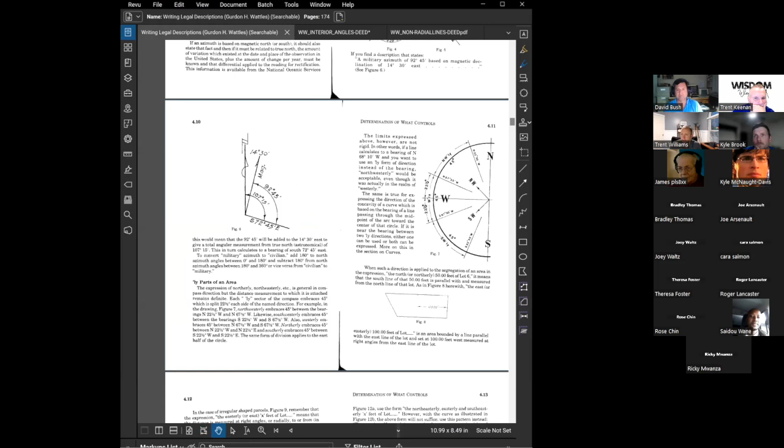So jumping into the book now, kind of these controlling calls, and we'll even talk about some of these in a little bit. But this first big section here is the apostrophe 'ly' parts of an area — the northerly, northeasterly. And again, that's something I noticed — was that first one, westwardly. Yeah, that's 'wardly' — eastwardly, westwardly, easterly, westerly, 'wardly'. One we don't see.

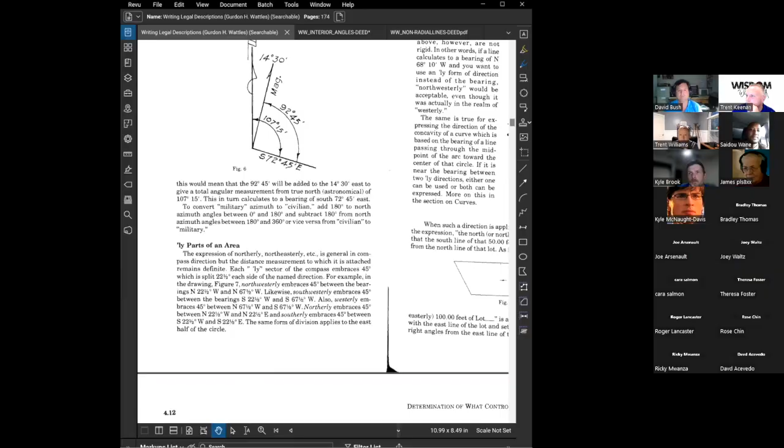Right. Can you try to zoom in on your screen? Because what happens is interesting — it shows the whole box, like the whole Adobe thing. It's showing my Adobe. Yeah, I'm not sure, because I'm using Bluebeam. I don't know how to do a full screen in this. Oh okay, maybe that's why. Yeah, I'm not sure, let me... You want to stop sharing, and then I can see if mine looks any different. Let's see.

Does that look different to you guys? Is that better? I noticed it even earlier today when I was doing some share screen stuff. It's bigger. Okay, cool. That works for me.

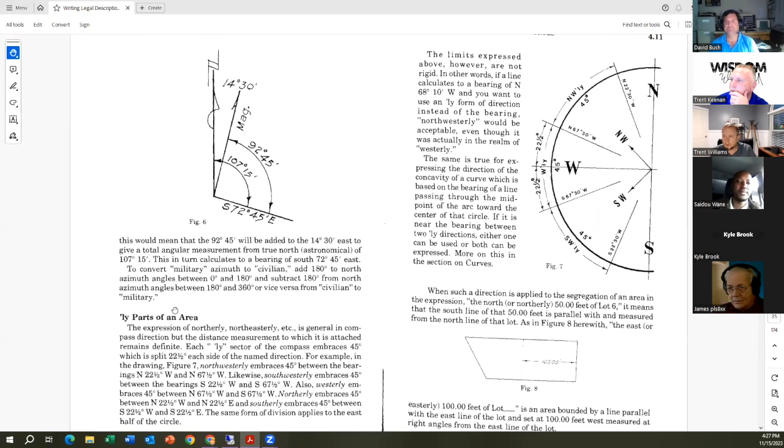So we were on page 410, which is really where this part is. This is the hardest thing to get through. If we want to do the roundtable discussion like we have been, there's a lot of figures, and he goes through how and why some of these don't work.

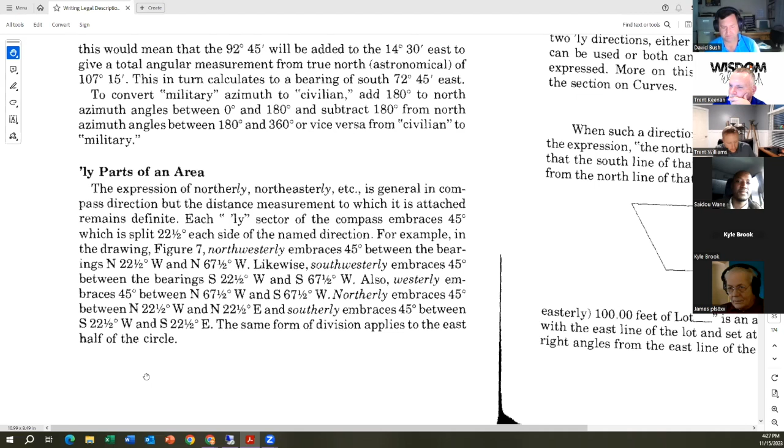If we go to the top of page 411, he has half a compass here, and he's trying to explain how we decide: is it northwesterly, or westerly, or southwesterly, and where do these determinations come from? He's oddly specific, and I've never given it that much thought, but it makes sense what he's coming from. As a general rule, I've kind of followed what he's got here.

That would be interesting because you've got basically almost a 45-degree angle that could be construed as westerly or westwardly, depending on the part of the country. That's a pretty big spread where you'd think westerly would only be plus or minus a few degrees. I'm with you, that's pretty big. And southwesterly, you'd think would be more at a 45-ish angle, but those are some pretty big spreads.

I think what he's trying to show is we're talking about an area of a shape, not necessarily the direction of a line. So if you had a figure and you're trying to show the westerly portion of the figure, you're probably going to cover more of that area, that angular area coming off of a vantage point or something.

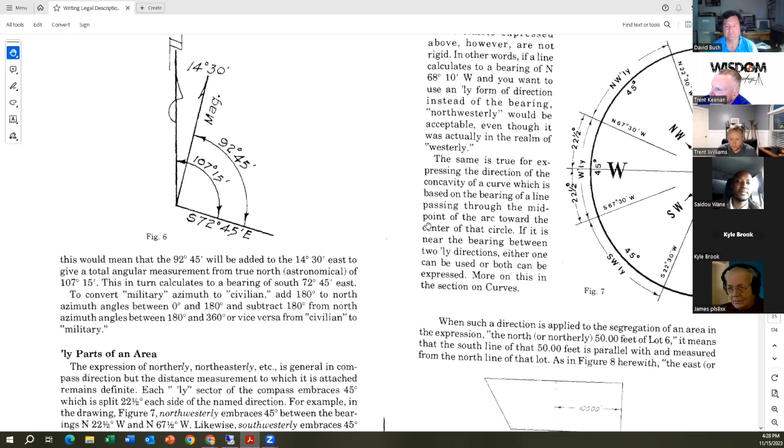His first one, right under figure 7: when such a direction is applied to the segregation of an area, in the expression 'the north or northerly 50 feet of lot 6,' it means that the south line of that 50 feet is parallel with and measured from the north line of that lot, as in figure 8 herewith.

The east or easterly 100 feet of a lot is an area bounded by a line parallel with the east line of the lot and set at 100 feet west, measured at right angles from the east line of the lot. It's kind of hard seeing that copy, but you can see where he's got the 100 feet and the demarking line there.

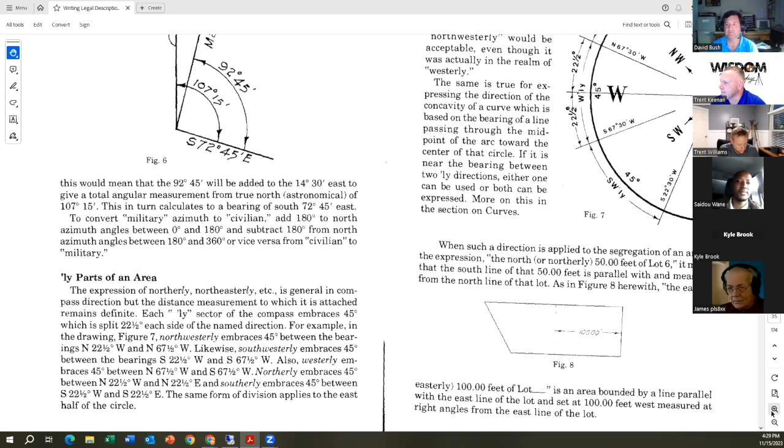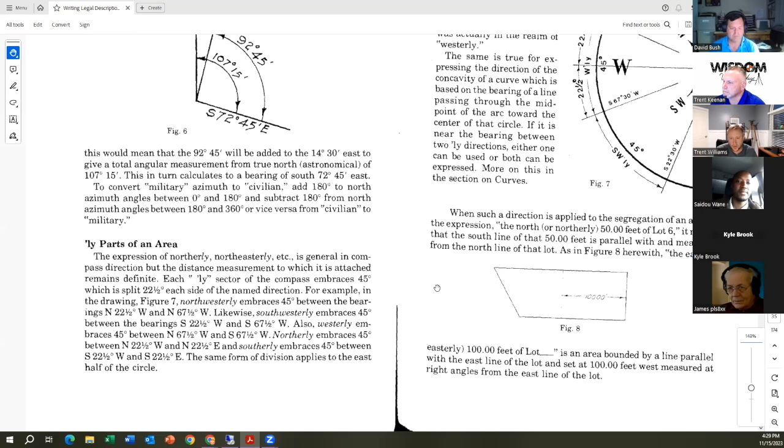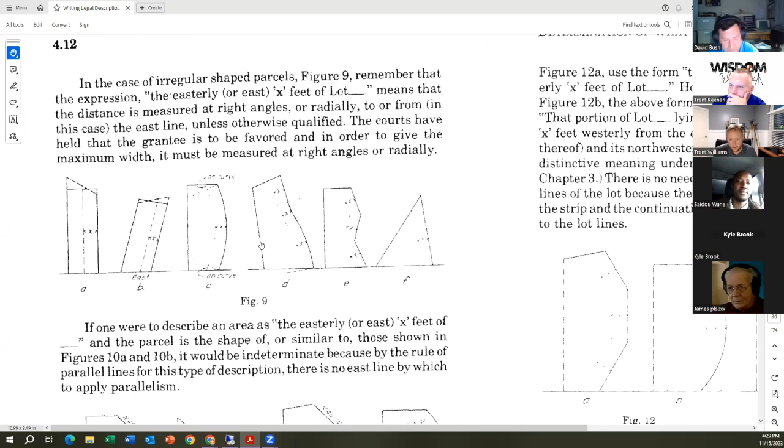Then he goes through a whole bunch of figures here, walking us through irregular shapes and what it might mean to describe the area of a shape. I'll throw the question out: he's given all these examples, but unless we're reading an older deed, how often are you guys finding some sort of area description?

I bet you East Coast it happens every day, right? Rarely out here, definitely in California, out in the West it's not common. Maybe some of the old ranchos or something like that. Even that is almost more like an aliquot part area—a portion of the east half of the section, the east 100 feet of a section or something like that. On the flip side, you probably talk to Joe and he sees it every day.

No, I don't see deeds excepting easterly or westerly that often. Honestly, that was described to me as a big no-no because of too many ambiguities in figuring out which way is which, and what do they really mean. So it's usually an exception, with a metes and bounds description describing the senior parcel.

I see a number of deeds where sometimes the acreage was the only thing you could depend on, especially if the deed originated back in the 20s or 30s and had been used in successive descriptions or sales of the property. So it's something I had to deal with on a regular basis.

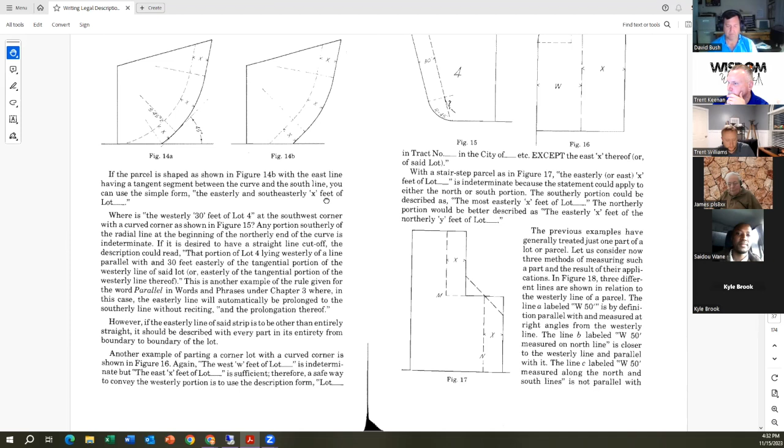But if we jump to the bottom of page 415, he does have an interesting one here. He talks about a stair step in figure 17. With the stair step parcels in figure 17, the easterly or east so many feet of lot is indeterminate, because the statement could apply to either the north or the south portion.

The southerly portion can be described as the most easterly feet of the lot. The northerly portion could be better described as the easterly X feet of the northerly portion of the lot, or is it some combination of that. I think if I were to read that, if it was the easterly portion and it didn't cut into that north area, I would just hold it as a southerly portion. But if the feet offset was far enough, that's a distance offset versus an area offset. I could see how it could be misinterpreted if you didn't know what the intent was or the local standard was for a parcel like this.

Again, kind of a rare example, we don't see very often, but certainly something we might want to be aware of. I think that's where that easterly 150 of the southerly 330 or something comes into play at that point, right? Where you're double calling. Double call's great, yeah.

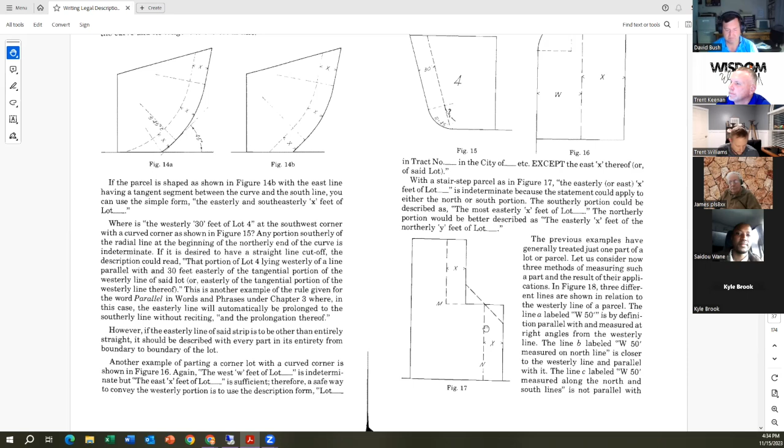And then jumping on to figure 18 here. A lot of these are on the FS or even the PS exam, a lot of these kind of construed parcels for exam purposes. So it's good to definitely read through a lot of this from an exam standpoint.

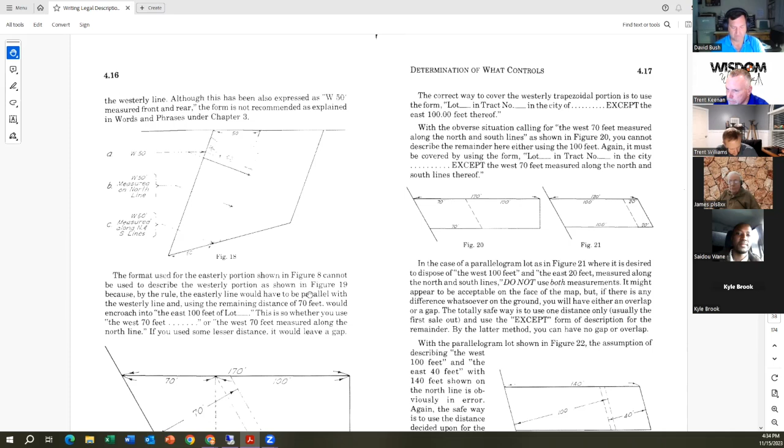Absolutely. So he says here, under figure 18, the format used for the easterly portion shown in figure 18 cannot be used to describe the westerly portion as shown in figure 19, because the easterly line would have to be parallel with the westerly line, and using the remaining distance of 70 feet it would encroach into the east 100 feet of the lot. So whether you use the west 70 feet measured along the north line, if you use some lesser distance, it would leave a gap.

That's messy. It is. The really interesting thing for me on this, again not having used these, is I might have missed some sort of call here. I would have assumed a parallel to that cross 70 feet versus parallel to the west line versus 70 feet along the north line, just not thinking about it that way, usually doing some sort of perpendicular offset. So you could misconstrue something really easily. That's really the biggest thing I've pulled out of some of these examples.

So is figure 8 a typo? I think figure 8's a typo, it should have been 18. 18, yeah, yeah.

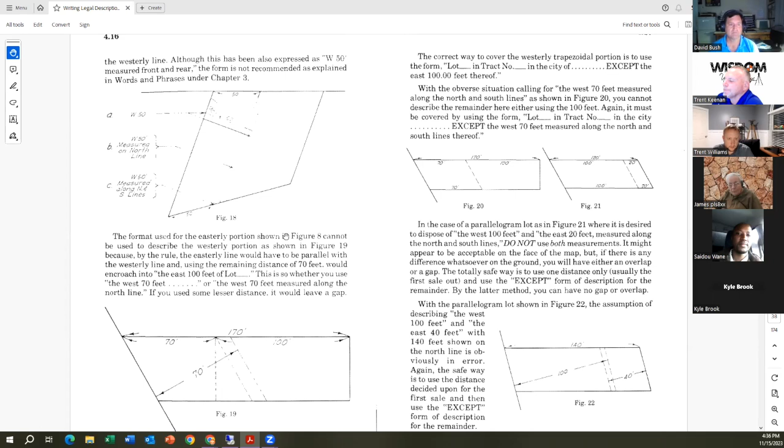So the next highlighted area, I guess we'll just go through this as a class, because there's not too much to discuss here unless anyone has examples. The next one I highlighted was figure 24. He says so far these examples have dealt with one part of a parcel using single direction and distance. It is possible to expand this format into multiple parts using 2 directions and 2 distances, 3 directions and 3 distances, 4 directions and 4 distances, etc. So he gives some examples of these.

But we can look at different ways of calling out. This figure 26 is definitely a unique one. An example of a triple call is shown in figure 26, where a 30 by 60 piece is taken out of the lot after a 20-foot widening of the street. Thus, the south 30 feet of the east 60 feet of the west 80 feet of the lot in the city of—that description works. But again, I don't know how often we see these or would ever write anything like this, but they're out there, and like Trent said, that would be good for any exam purposes.

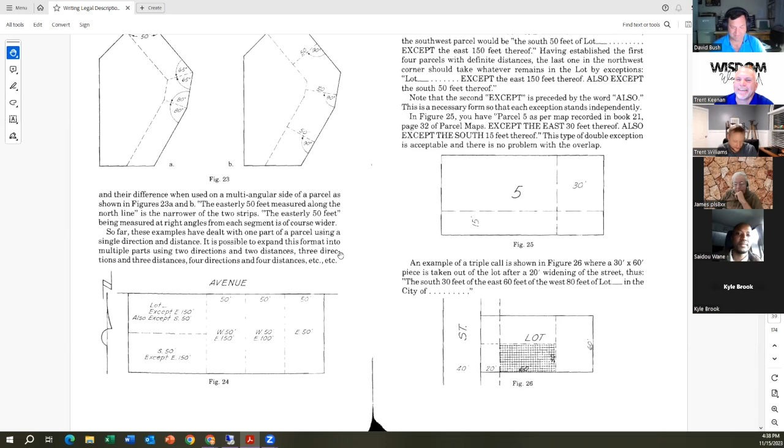Okay, any other questions about the portions? I'm going to call them portions of a figure, portions of a parcel, because now we're going to get into one I think we're going to get some arguments about, and I'm really excited for it. I think it's already started here a little bit when we're talking about convex, concave calls and all that. So his next section on the next page is curves in surveys and descriptions.

There you go. People have thoughts and feelings about it, and some of them are wrong. All of them are acceptable.

But curves become a difficult one, because the thing I try and teach—I've got some younger surveyors working under me—is it's really easy to, in AutoCAD, just sit here and punch bearings and distances, right? You go through a curve and it gives you a chord distance, bearing and distance, and it's easy just to keep punching those in. But the challenge in modern society, versus when this book was written or those more experienced surveyors, is AutoCAD likes to force things to fit sometimes, despite what you put in there, particularly on curves. So if you're just punching in chord bearings and distances and trying to create this arc that fits, far too often I've seen things bust when you try to create a parcel or description off of something drafted that way.

But there was a time where we were manually drafting everything, and it was easier or more consistent to write or calculate things in different ways, because we understood the math behind it. We don't understand the math behind it today—it's just bearings and distances on a piece of paper. And this figure 28 right here is a perfect example of what we don't understand.

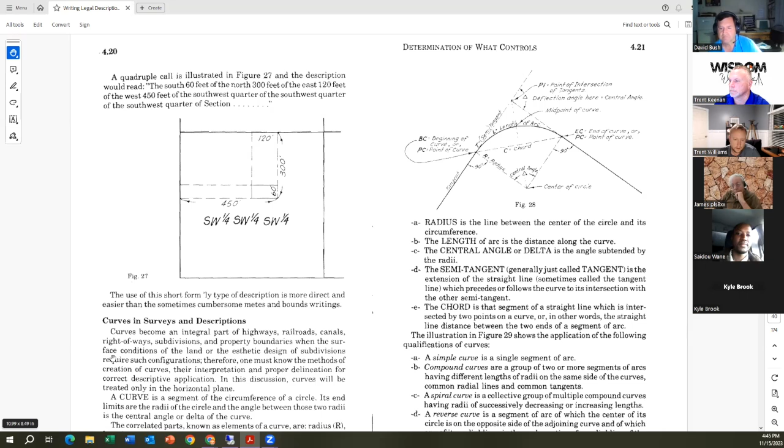The chord distance - the chord is that segment of a straight line which intersects 2 points on a curve, or in other words, the straight line distance between the 2 ends of a segment of an arc. And so they go through the application here.

And then there's different types of curves. A simple curve is a single segment arc - that's going to be probably your most standard description curve. A compound curve is a group of 2 or more segments of arcs having different lengths of radii on the same side of the curves, common radial lines and common tangents.

Or a spiral curve - a spiral curve is a collective group of multiple compound curves having a radii of successively decreasing or increasing lengths. Your most likely place to see a spiral curve is in railroads and some highway maps. Some highway departments did use those from time to time, and so you'll see them there.

I don't know, Trent, have you ever done a spiral curve class in Mentoring Mondays? There's a whole 4-hour class on parts and that, and I've done them just enough to know how to screw it up, and I'll leave it at that.

Yeah, I wish we could find somebody who could actually talk about it, because even from a CAD drafting standpoint, it's a pain in the rear.

We've talked about that a few times, but in the chat, in Ohio you have to describe 6 elements of a curve per Ohio Administrative Code. That's a lot. We're showing 5 right there with radius, length, central angle, semi, and chord.

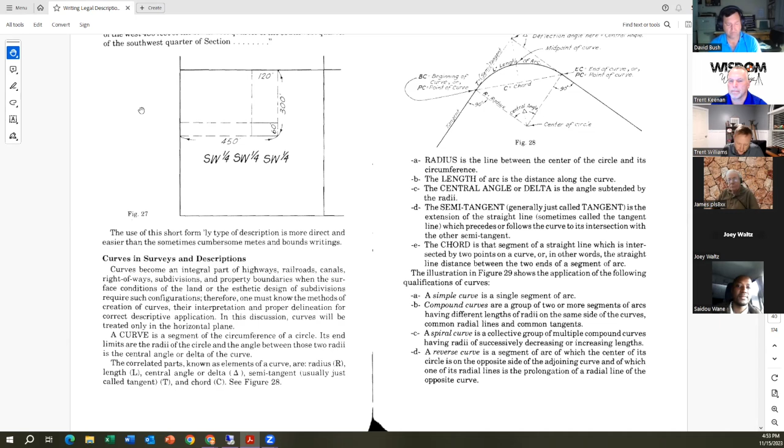Jump to the next page. He's got just a bunch of definitions, another great example of how we could screw up curves in a description. Very complicated curve diagram. He's got a tangent curve. Tangent curves have a common radius point or prolongation of each other's radius, though they may be of different lengths. Therefore, compound curves and reverse curves are by definition tangent, which just means that when you're writing your legal description, you don't have to say a tangent compound curve or a tangent reverse curve.

Yep, absolutely. And there's another thing, if you're doing design or working on lines that are near tangent, it's important to call it out or recognize that maybe a line isn't a tangent curve, or a curve isn't a tangent curve. Because it could be near tangent and could screw something up if all the information isn't there. I've definitely seen descriptions where they seemed like tangent curves and not all the information was there, and they ended up not being, and it could mess something up.

So tangency, and I just explained this to a young drafter today, tangency at a point of a curve to a line or curve means the radius line is perpendicular to that line, or the tangent of the curve at that point of curve. If you go back to basic algebra or geometry, a tangent line only touches a curve or a circle or an arc once. That's it. So the only way to make that happen is it needs to be perpendicular to the radius, or to the bearing to the center of the arc.

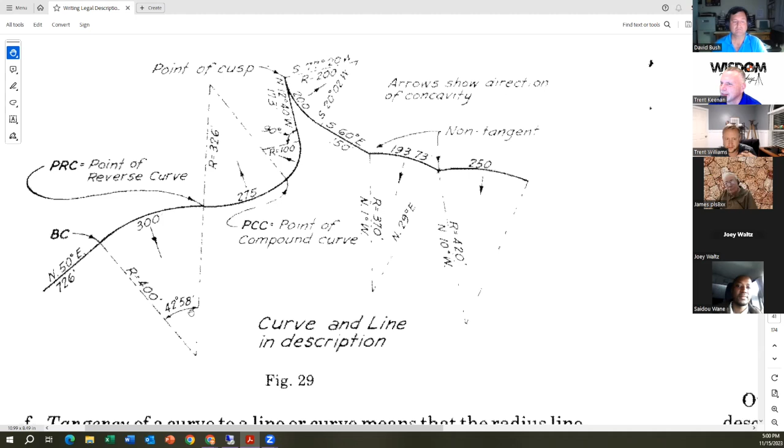No, absolutely, you've got foot error, even foot error. I totally agree with you. It's just that I'm working with AutoCAD or a data collector that can round the numbers all the way, so I'm thinking I've got to get it that precise, and then I realize I'm at the tangent and I've got myself some error. So it makes total sense that I need to dumb down the precision to get the original delta. You could be, like you said, plus or minus by the time you get over here to the point of cusp - that could be a 5 or 10 foot radius of error.

Error, really, right? Yeah. And it gets double hard when you're working, let's say in AutoCAD, and you're working in parcels and it needs to close, or you've got a description that the county wants to close.

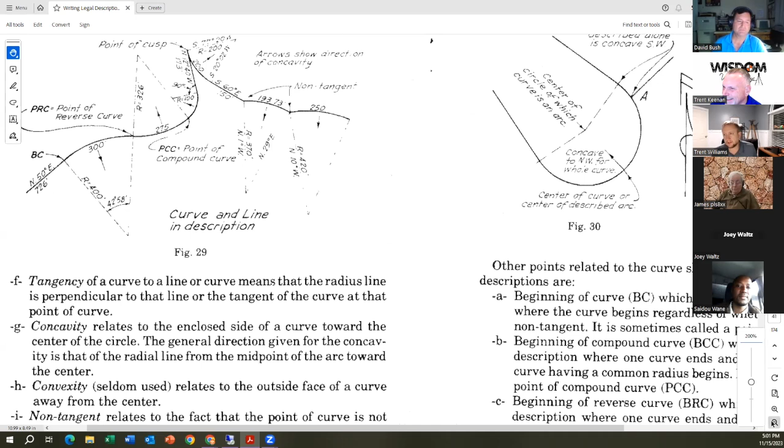There are other things in there in this discussion that kind of happens, maybe for the field procedures you dumb it down a little bit and find whatever evidence you can. But as you write or rewrite a description or show it on a record of survey, you can show where you've calculated this out but can't get it to close with these ones. So here's where I've placed my error. Record is 4258, measured is 4258.19 or whatever you were getting, right? And so you can show and explain how you got it to close or where you placed the error in there for the next person to follow.

Certainly a narrative helps in that. We talked a lot about that in the last book, is just explaining that. Went out there and I couldn't get it to close. Here's my significant digit. So I went through this process to find it.

Or maybe you're out there in the field and you do hold the 4258 and you hit a brass cap perfectly. Or on the other side, you don't. You miss the brass cap, but the brass cap fits your calculated 4258.19, and so there's some evidence in there to start evaluating, and that's what gets into the PLS side, that evaluation of evidence.

You start at face level with whatever you have, and then work backwards or forward from there and defend yourself in any decisions that are made. And in that case, there may not be a right or wrong decision. You could throw the error into any one of those three based off of the evidence you find, and if you can defend that in a written narrative, I don't think anyone's going to hold that against you, because you've explained how you got to where you did.

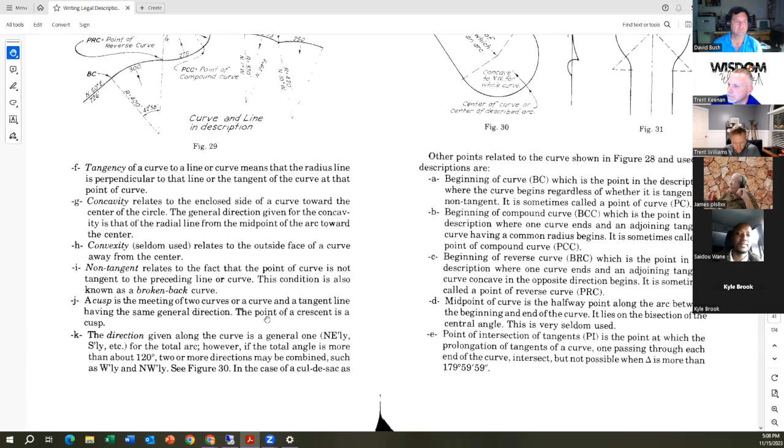Midpoint of a curve is halfway along the arc, and the point of intersection, PI, is a point at which the prolongation of tangents of a curve passing through each end of the curve intersect. I think the first figure, figure 28, had a better example of what a PI is, just for clarity's sake. You've got your two tangent lines that turn into the arc, but if you were to extend those two straight lines to the 90, that's your PI where they meet.

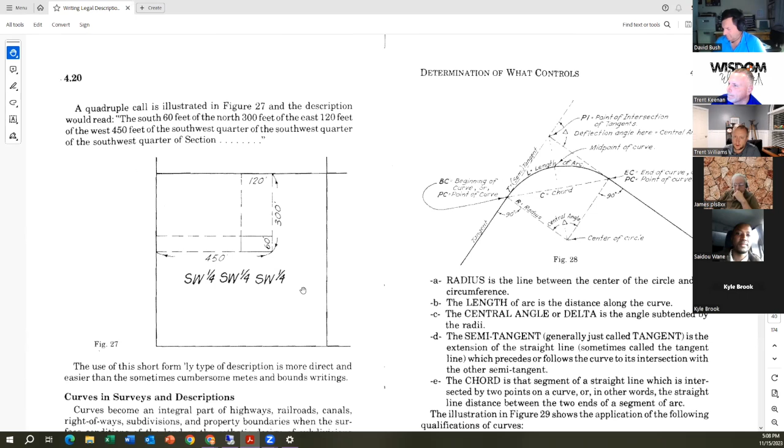If you get into geometry math there's a lot with non-tangent curves or even tangent curves, but you've got where it says PI right there, the deflection angle, the central angle. There are some figures from your old high school math books showing opposite angles are equal. You can even calculate out, if you were to create a complete square and cross intersection at that PI, the east and west would be the same angle, and the north and south would be the same angle. So you can do quite a bit of math there. If you don't have all the information, you can mathematically extract out quite a bit. We won't get into math class here, but those who were good at it can remember some of those geometry formulas for pulling angles out of figures.

So there's some abbreviations. Is there any other local abbreviations you guys use that aren't listed here?

Are we allowed to use any outside of this book? No, Wattles is the truth, right? That's all we've got.

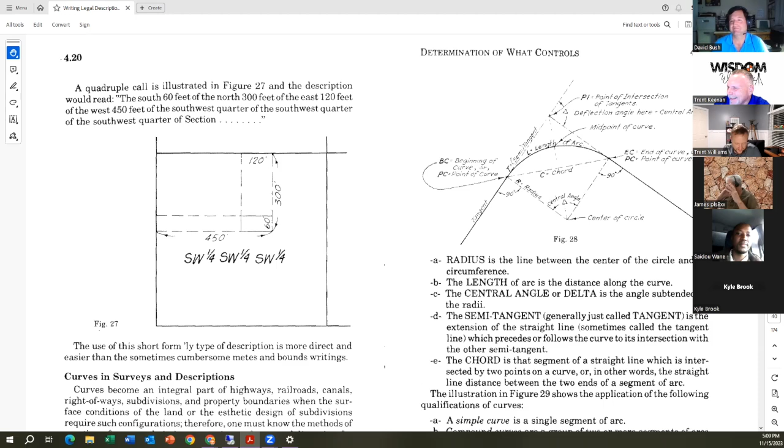Next page, he's got EC, end of curve, center circle. I highlighted this right here before figure 32: before proceeding with multiple curve calls and curve description writing, let us consider the problems involved by the use of the words right or left. This is the way I like it - we disagree here. The use of words right or left to connote one side or the other is not fully satisfactory. In the early days, courses of a river would be described as following the left or right bank going downstream. Attempts were made to adapt this to other uses, but inherent variables made it uncertain. See figure 32 - a compass direction or a positive bearing is much to be preferred. He gives examples like figure D, right and left, because you're turning, or at figure B and C, which make those right or left determinations a little more difficult to make. I guess I'm not dealing with courses or rivers and downstream calls enough to consider that, but there we go.

I jumped over. Any other questions about the curves? He gives a lot of examples here, but I wanted to jump over to some other highlight areas. So on the next page, figure 33A and figure 33B.

Teresa has one in the chat. She's got a spiral curve, BCT, begin curve taper. Yep, we just saw this week on an old railroad map we're dealing with in Tulare County. This is begin curve taper, compound curve taper, it looks like. Holy moly. I don't know what CCT is, I've never seen that. I know begin curve taper, but what's the other one? It has to be something to deal with a spiral curve.

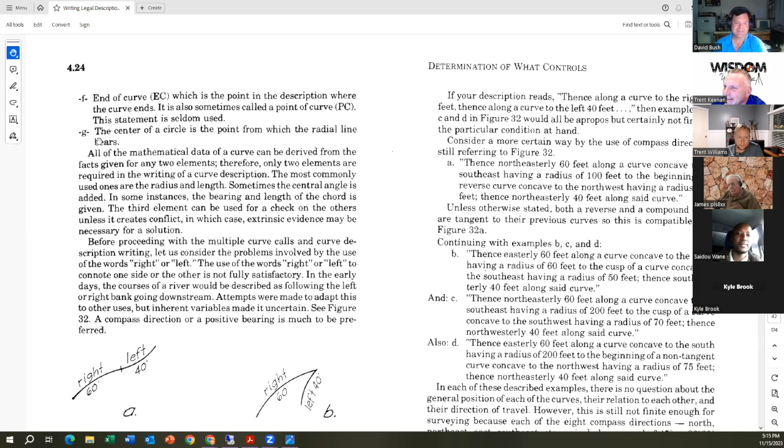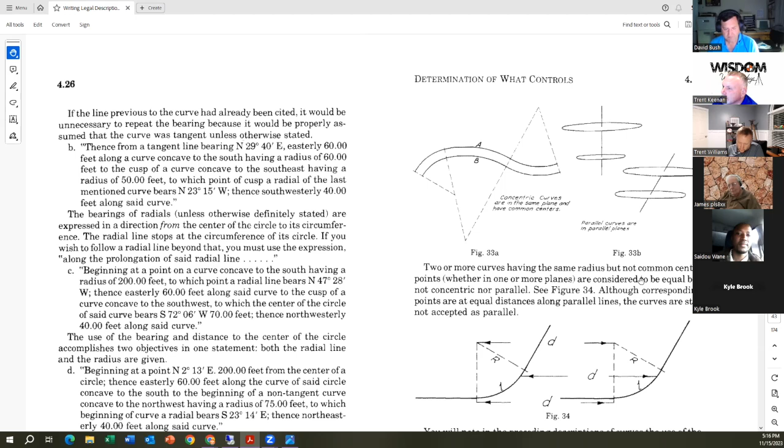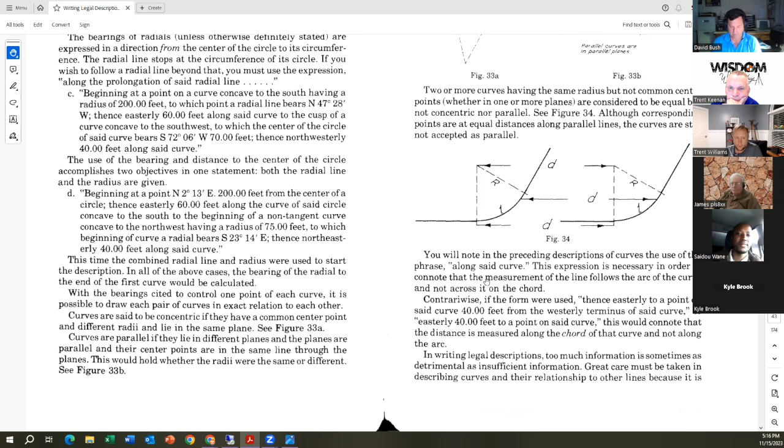Thank you, jumping back into the book here. Trent, I'm jumping down to figure 33A, 33B on page 427, the next page down. He gives some more examples here: two or more curves having the same radius but not common center points, whether in one or more planes, are considered equal but not concentric or parallel. Figure 34: although corresponding points are at equal distances along parallel lines, the curves are still not accepted as parallel. So just some interesting ways to view curves and have them written, making sure you're doing whatever evaluation you need to understand what they intended to write or display there. Then on page 429, he gives another really good example of possible alternatives with multiple fixed curve calls.

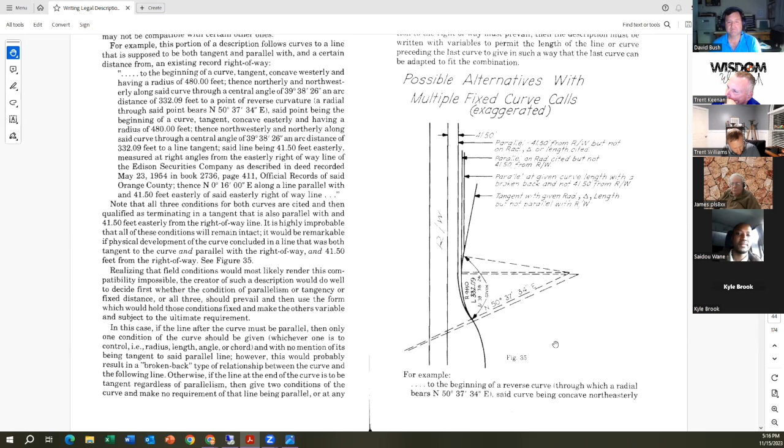So he says, in this case, if the line after the curve must be parallel, then only one condition of the curve should be given—whether it's radius, length, angle, or chord—with no mention of its being tangent to said parallel line. However, this would probably result in a broken back type of relationship between the curve and the following line.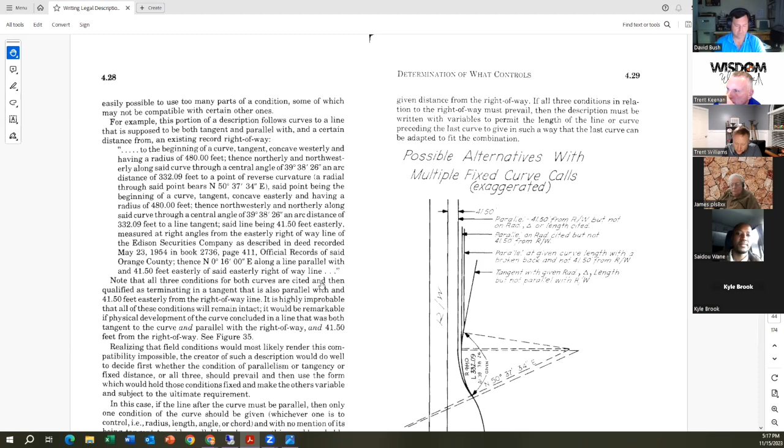Otherwise, if the line at the end of the curve is to be tangent regardless of parallelism, then give 2 conditions of the curve and make no requirement that the line be parallel or at any given distance from the right-of-way. If all 3 conditions in relation to the right-of-way must prevail, then the description must be written with variables to permit the length of the line or curve preceding the last curve to give in such a way that the last curve can be adapted to fit in the combinations.

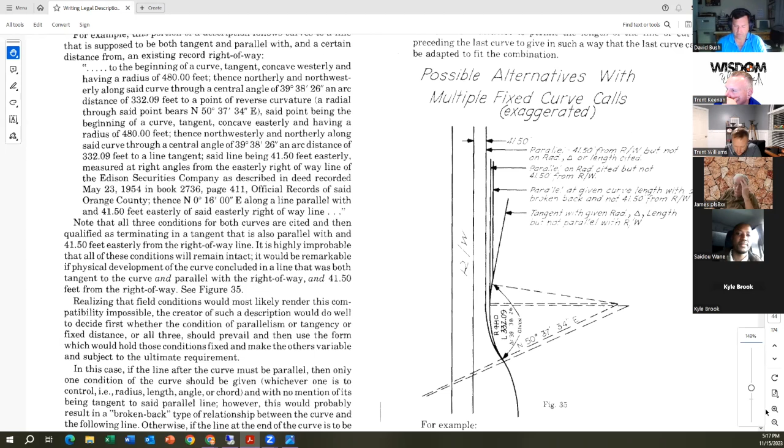So we have a right-of-way here, 41.50 feet offset. The first one is parallel 41.50 from right-of-way, but not on radius, delta, or length cited. The other curve is parallel on radius cited, but not 41.50 from right-of-way. Parallel at given curve length with a broken back and not 41.50 from right-of-way. Broken back being non-tangent—he kind of mentioned that, but just make sure we clarify. And then tangent with given radius, delta, length, but not parallel with right-of-way. So some interesting ways that curves can be described or misinterpreted in there.

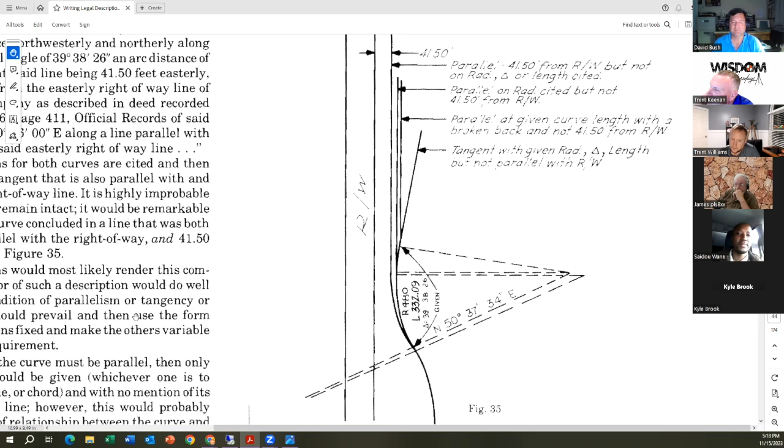That goes back to some of Joe's comments about—although, I mean, this one they have the even foot on the radius, the length is to the hundredth. The delta is to the seconds. It's crazy the amount of error you're still going to get. Yeah, absolutely.

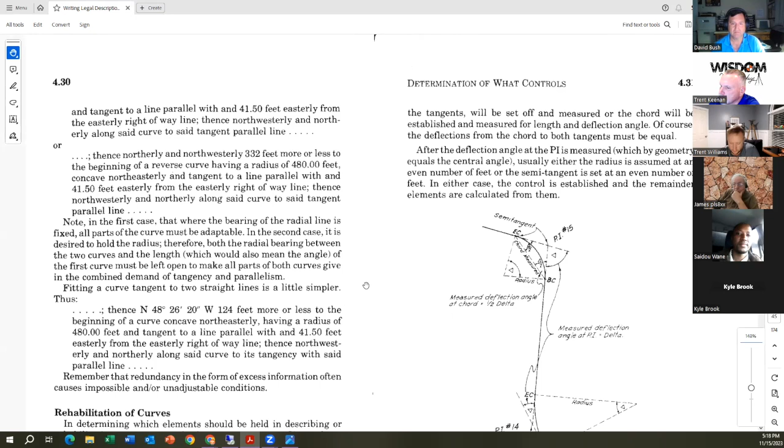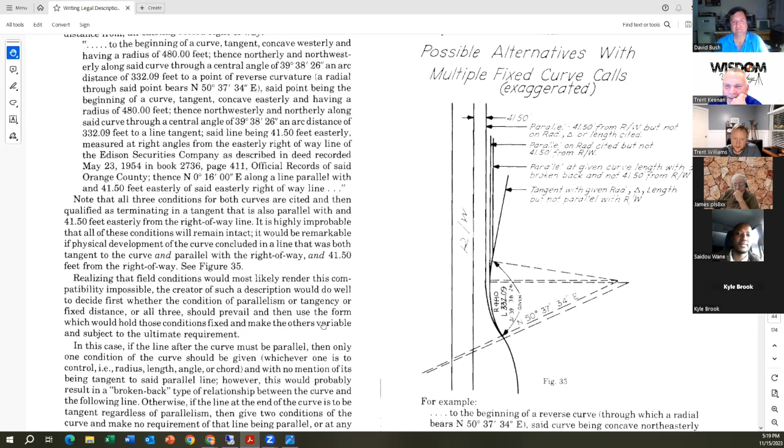Kyle, when describing a concentric curve, should they be concentric with or concentric to the other curve? I asked because Wattles is specific about using 'parallel with' and not 'parallel to,' but he doesn't even mention this. And I'm like 3/4 of the way through this question I'm writing, and if he would have just been clear about this, I'd be done already. That's awesome. Yeah, I'm not quite sure what he'd lean to there. That's a good question. Yeah. Oh my gosh.

Okay, so let's see, we are at 6:20 here, my time. Yeah, so good, we've got time.

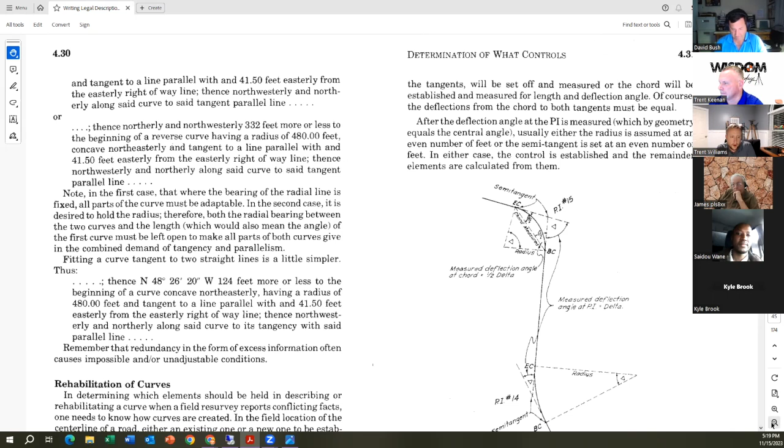Here's the question everyone keeps asking here on 4.30, rehabilitation of curves. And I apologize, I'm reading a lot out of this, but I think just going through what he says is better than me trying to summarize some of this. Let's just read out of here and we can go through some of these examples. In determining which element should be held in describing or rehabilitating a curve, when a field resurvey reports conflicting facts, one needs to know how curves are created in the field location of the center line of a road, either an existing one or a new one to be established.

The general procedure is to locate the middle of the straight sectors and prolong their tangent lines to intersect, and set those points of intersection for control. The deflection angle at the PI is then measured, although sometimes the angular measurement is set first at an even figure and the tangent line is moved to conform.

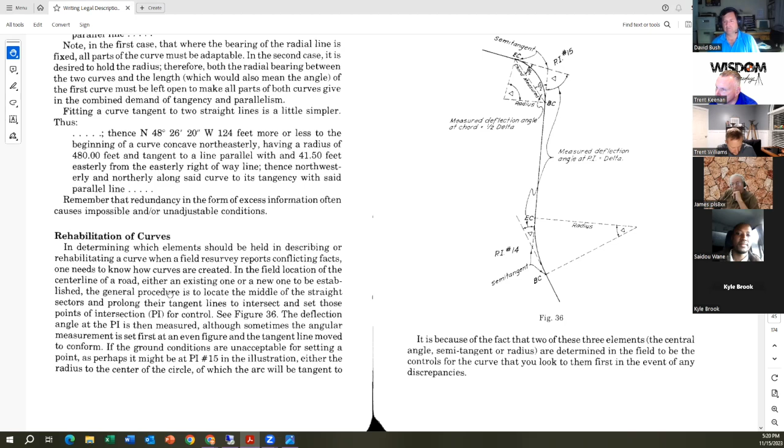If ground conditions are unacceptable for setting a point, as perhaps it might be at PI number 15 in the illustration, either the radius to the center of the circle of which the arc will be tangent to the tangents will be set off and measured, or the chord will be established and measured for the length and deflection angle. Of course, the deflections from the chord to both tangents must be equal.

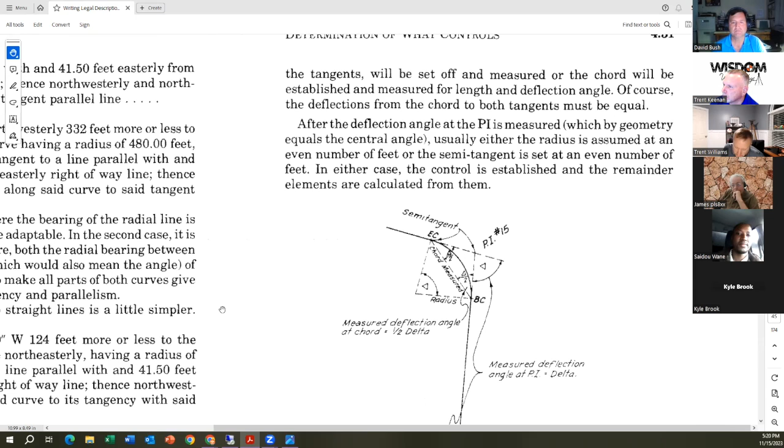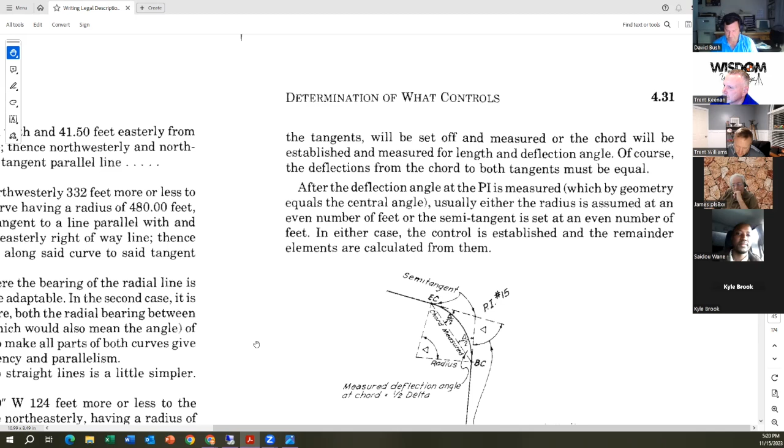After the deflection angle at the PI is measured, which by geometry equals the central angle, usually either the radius is assumed at an even number of feet or the semi-tangent is set at an even number of feet. In either case, the control is established and the remainder elements are calculated from them.

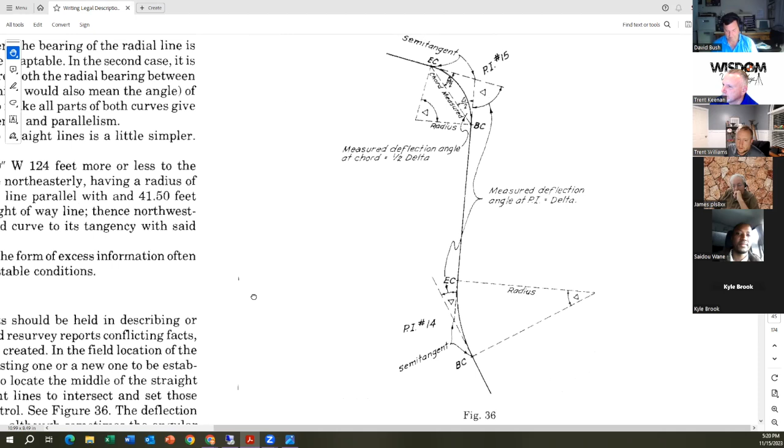So that gives us some direction to answer those questions, the big what-ifs. And so what I'm gathering from this is you're actually taking the tangents and extending those out, and then working back from your PI there to figure out a best fit in all those. So you might not be holding the radius or the deflection angle—creating those tangent lines being probably the more critical method that he's explaining here.

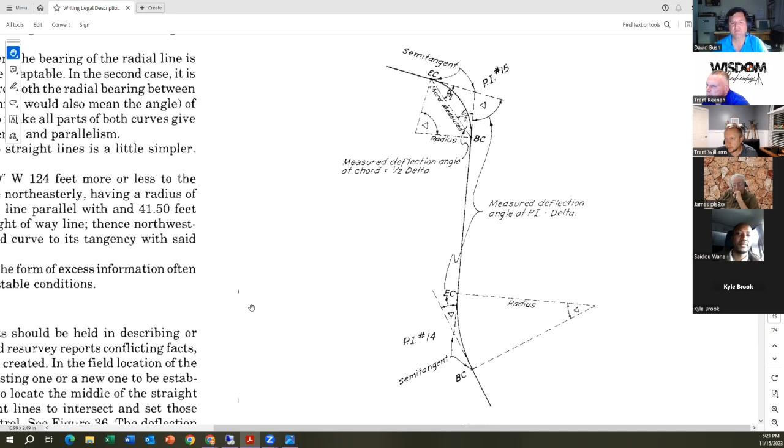Any thoughts, confusions on there? Does that all make sense? That was a mouthful to read because we're tangent to the tangents.

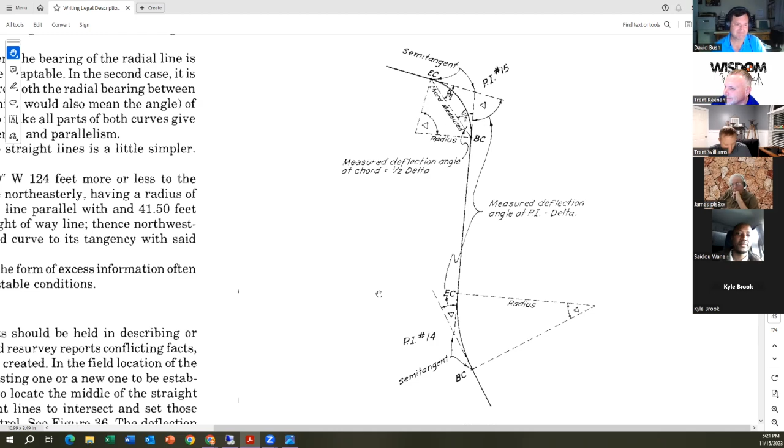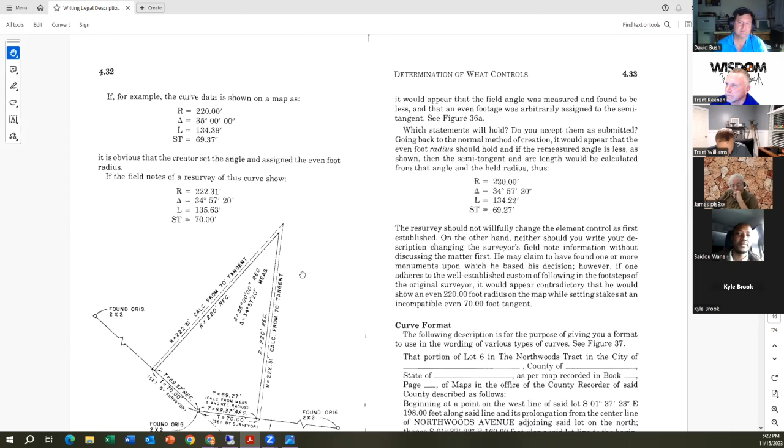So he gives some calculations on the next page, looking through some of this. He even gives an example. It is because of the fact that two of these three elements, the central angle, semi-tangent, or radius, are determined in the field to be the controls for the curve, that you look to them first in the event of any discrepancies. So on the next page, if, for example, the curve data is shown on the map as the following...

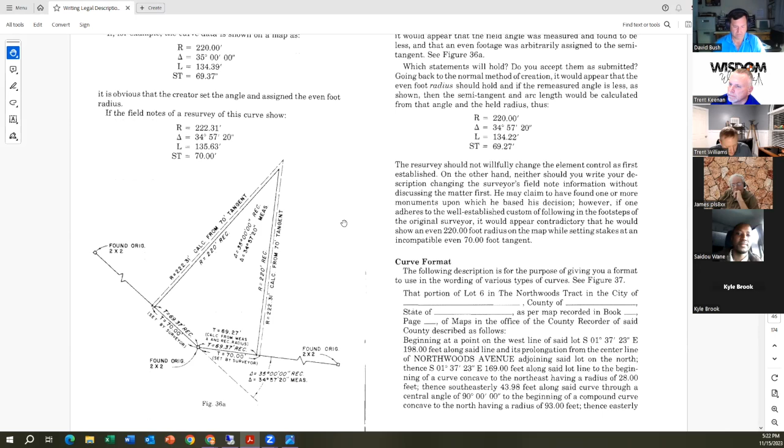It is obvious that the creator set the angle and assigned the even foot radius. If the field notes of a resurvey of this curve show this, we've got this example of how to work through those. He shows the found original 2x2 in the tangent lines, and you can start calculating out those angles and then calculate the radius from the tangent.

Certainly don't want to get into a math class here, but want to make sure there's no questions on this, if we need to spend some more time discussing it.

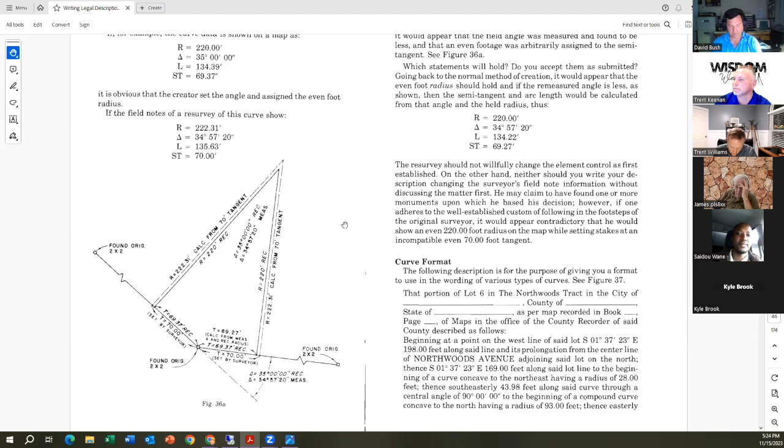It says that portion of lot 6 in Northwoods Tract, city of, as per map, beginning at a point on the west line of said lot, southeast 198 feet along said line, and its prolongation from the center line of Northwoods Avenue, adjoining said lot on the north, thence southeast along said lot line to the beginning of a curve, concave to the northeast, having a radius of 28 feet, thence southeasterly 43.98 feet along said curve through a central angle of 90 degrees to the beginning of a compound curve.

So that's his example, at least a good example of how he would write a curve. We're giving out the critical information first, the concave direction and the radius, and then we go through the curve as almost a separate call: southeasterly 43.98 feet along said curve through a central angle of 90 degrees to the beginning of another curve.

When I read this again, when we talked at the beginning of this book, I threw out the challenge that descriptions shouldn't be written in paragraph format as they are here. You'd often see that in a kind of two-line type thing, where your first line has the qualifying calls for the curve, and then the actual calls through the curve.

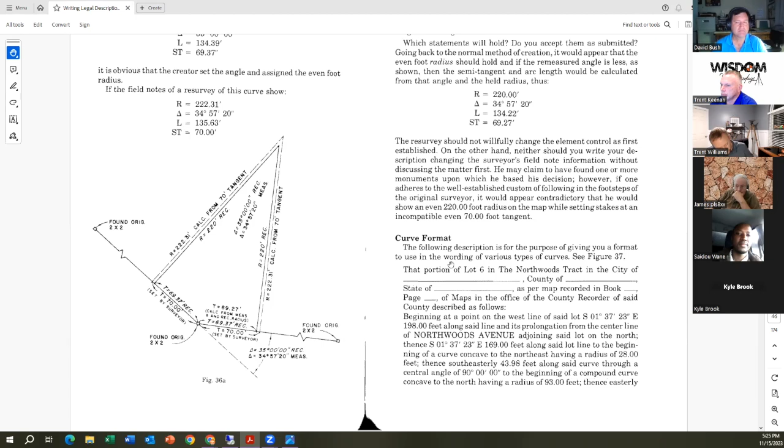He kind of does the same with the compound curve—concave to the north, having a radius of 93 feet. Then easterly 50.69 feet along said curve to the beginning of a reverse curve, concave to the southwest, having a radius of 45 feet. Then he actually throws in the radial line for that: radial line through said beginning of reverse curve bears, then easterly and southeasterly 88.77 feet along said curve through a central angle of 113 degrees. So he's thrown a lot of different examples together real fast.

So I guess David, that's how you guys see them more generally written out there with the concave and that kind of format? Yes, this is exactly how we see them on a regular basis.

Okay. Our general way we see them here is to a point of curvature, and then thence, let's say easterly, along the arc of a 50-foot radius curve to the right, and then in parentheses we'll give all the information—said curve having a delta of, the center bears this direction, through a chord bearing of, and that type of stuff in parentheses secondary to that. That's a pretty general Utah way of writing things. I'll bring an example next time.

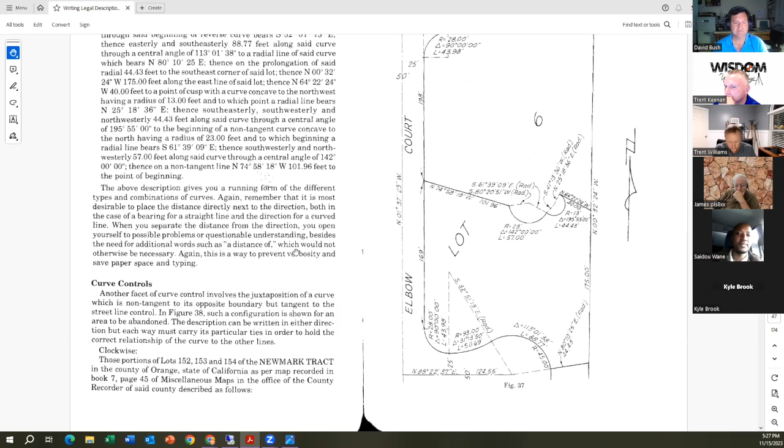I'll have one prepared when we start the discussion next time, just so we can see a different way of writing it. There is a whole lot on curves and still a whole lot left in this chapter here.

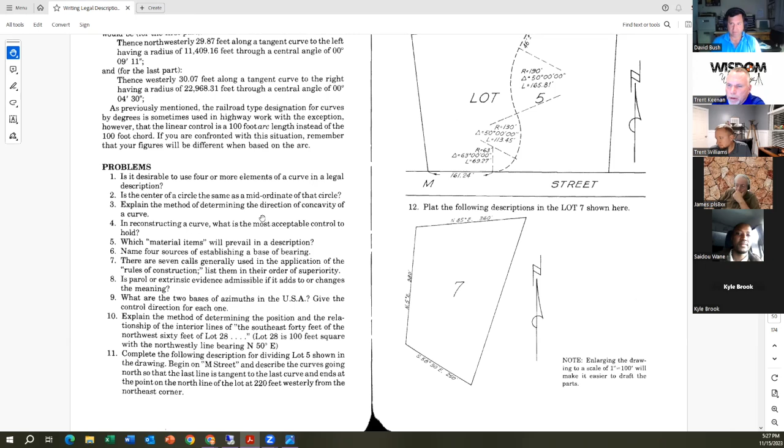Do you want a part 3? Are we going to do it as a part 3? Okay, I think there's enough. We'll get into chapter 5 for sure next time, but I think there's enough to go through. I think we'll go through it rather quickly, but there's still enough to go through here, and some great examples that it's worth stopping at the half-hour mark.

And taking a break. So any other questions about curves, what we've gone through? Certainly a lot of math class here, a lot to consider. So a lot of what-ifs. All good stuff. Yeah, everything you see every day.

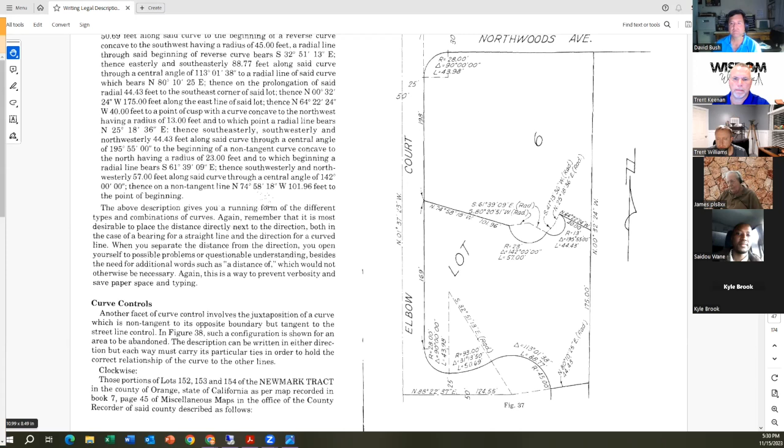Perfect. At the end of this chapter, there were some questions pointed toward a particular lot subdivision of several tracts that were cut out of a single lot. It was a very interesting little example, I thought, and it stopped only one tiny bit short of something that a lot of surveyors will stumble over to their detriment if they're ever in court.

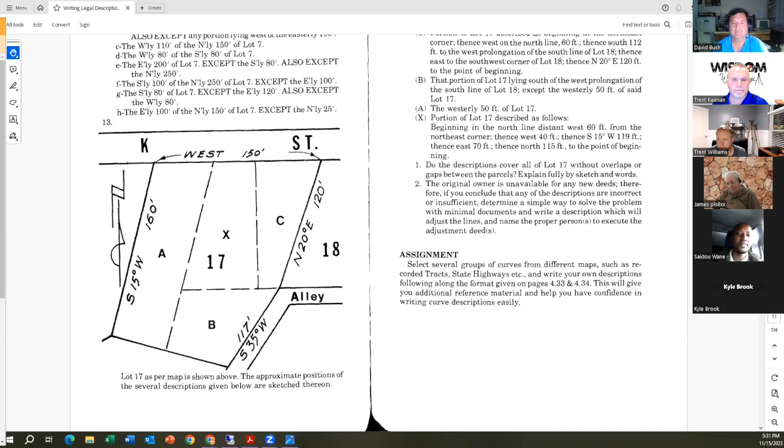I would encourage people who are surveyors or want to be surveyors to take a close look at that. There's some principles involved in there, one being, I guess, what surveyors would call seniority of deeds. That'll take you a long way, but there's a little more to it than that. I really encourage people to look at that.

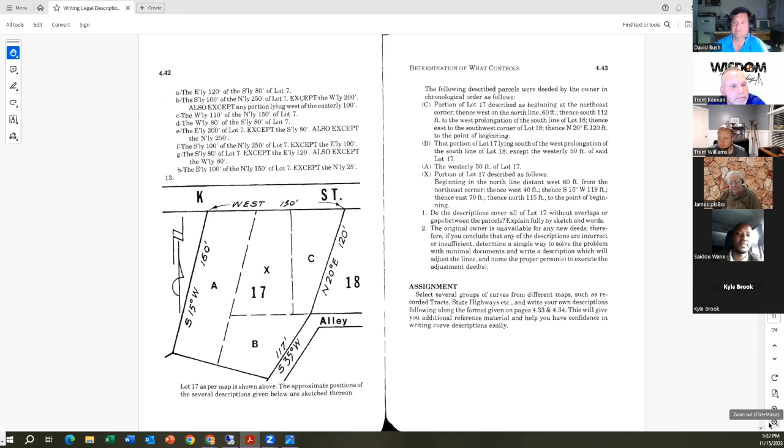Like he says, you don't necessarily have to watch it live, you can watch it later. You lose out on the Q&A part of it, but at least you can always watch it. So yeah, absolutely. Thanks, guys. Have a great Thanksgiving. Awesome. See you in a couple weeks. Bye, everybody, thank you very much. Bye, have a good night. Bye, guys.